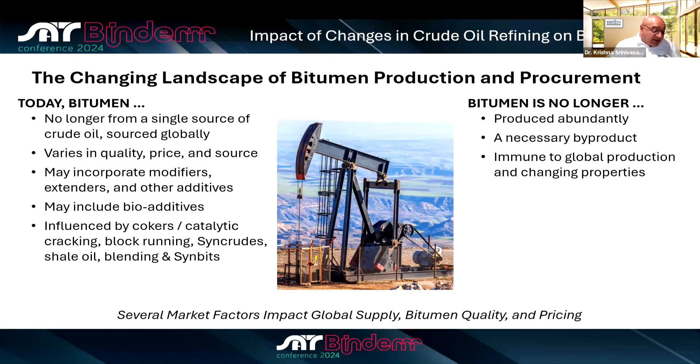The quality of bitumen today may also be influenced by a host of different technologies that didn't quite exist in the last century. Things like cat cracking, syncrudes, even synbit, block running, and a few other things. So bitumen today is not produced abundantly, is not a necessary byproduct, and is increasingly being defined by economics outside our control.

So, what is this new world that we find ourselves in? Many of these elements are familiar to you, so I'll go over a couple of them. But basically, if you give a supplier a spec, he will meet it. That may or may not be what you want. So it is incumbent upon each one of us to define what performance means to us in terms of conditions of traffic, in terms of climate, in terms of expectations for a lifetime.

You see, the very PG specs that were put together at the turn of the last century, several state departments are modifying them. Now you have PG plus with MSCR. You have PG plus plus with perhaps some mix level testing also thrown in, in terms of fracture toughness, in terms of moisture resistance. Your grandfather probably defined a pen softening point spec, and that served him well. It even served his son well, perhaps. But that kind of permanence is now disappearing, and there's an ongoing search to define better. And newer analytical techniques have also helped define what is needed for performance.

Another point that needs to be mentioned is several regions, several countries have become completely or partially dependent on imported bitumen. Several facilities have closed. Certainly, new ones have come up, but many have closed. And South Africa is perhaps just one example of this. You will have to learn to live with imported barges every 1, 2, 3, 4 weeks, and some advanced recon may now become a key tool in your toolbox. High RAP mixes are also becoming more widespread around the world. This has an impact on demand, and that has an effect on reliability of supply and perhaps even quality.

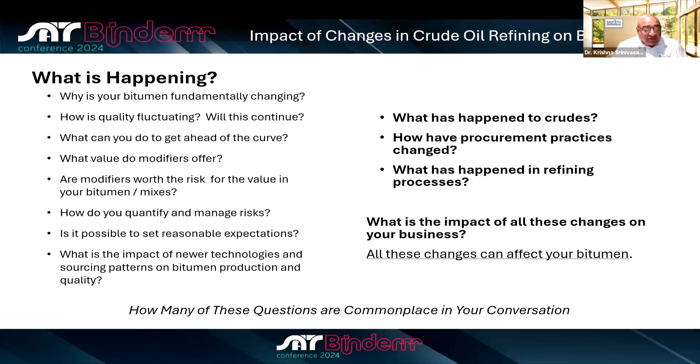How did we get here? This is part two. This is a crude depiction of some of the changes in the crude oil process. Pardon the pun. I'll provide some of the backdrop and highlight some of these. In the 80s, it was quite common for refineries to either operate on heavy crudes or light crudes. Heavy crudes, heavy in bitumen content, heavy in solids content, and light crudes exactly the opposite. The appearance of crack spreads used to cause great dislocations and perhaps jeopardize the economic viabilities of several companies. So today, refiners can operate with either just by the flip of a switch. In fact, they operate with multiple input crudes, called a slate of crudes, that consists of elements from both or either.

Cokers, predominantly introduced maybe late 90s, have now come to, and light end harvesting. This is simply the practice of getting more and more light ends from that barrel of crude, and therefore that has changed what's left behind in the bitumen and impacted the bitumen characteristics. As has the practice of using synthetic crudes, shale oil crudes. Really they've been created to run very efficiently in refining operations, but some of them do produce poor quality, documentedly produce poor quality bitumens.

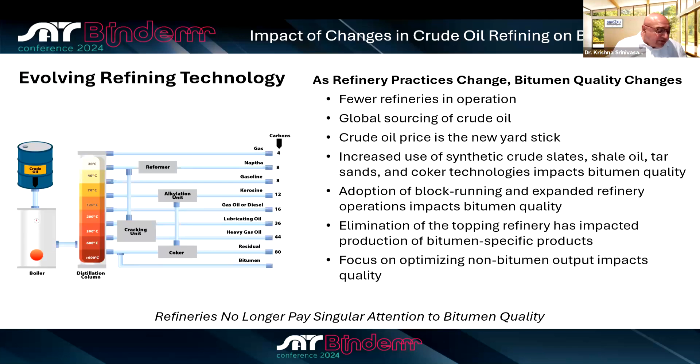Why is all of this important? Ladies and gentlemen, I'm going to lay out some corollaries for you. And I'd like each one of you to say to yourself at the end of my sentence, while still meeting functional specifications. So let's play this game. Different crude oils, and different speakers today have alluded to this, different crude oils yield different grades of bitumen, while still meeting functional specifications. Blending of different crude oils or blending of different bitumens creates different functional characteristics while still meeting specifications.

So you see, there are a number of factors that can be changed at your bitumen level while still meeting what it is that you have nominally defined as a spec. And this is what people are discovering. Something may meet spec for softening point or PG grade, but may not be suitable for PMB, polymer modifieds, in terms of stability, in terms of compatibility with bitumen. It may not meet emulsion producers' requirements. So there is that element that has to be considered today.

The other thing that I do want to touch upon briefly is there is a large number of new players. There always has been a large number of new players entering this business. What is new here today is the rise of integrated traders. These are people who initially started off as price speculators, either in crude or in bitumen.

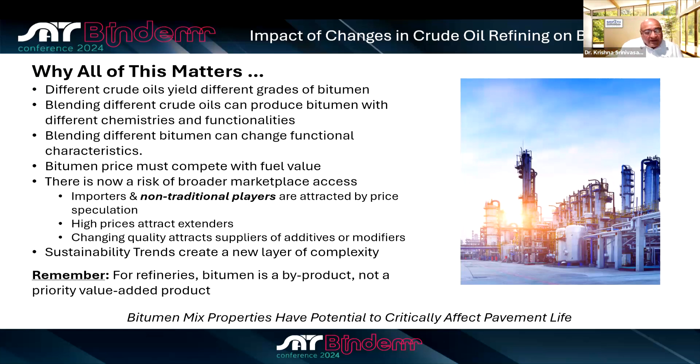2-minute warning, sir. Yes. Can you hear me? 2 minutes.

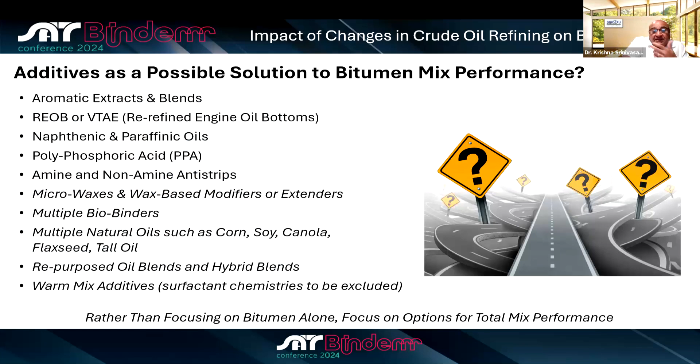So there have been quite a few impacts of these changes. I'll highlight a few of them very briefly. There has been an astonishing rise in the number and scope of modifiers now used in this industry. I'll just point out some of these. Most of you are familiar with them. The ones in italics are the ones that are perhaps more recent.

Another consequence is the rise of PMBs, perhaps even in overspecifications. They have a history of documented performance, and so there's perhaps an increase, and some of this may have been driven by traffic conditions, by climatic conditions, etc.

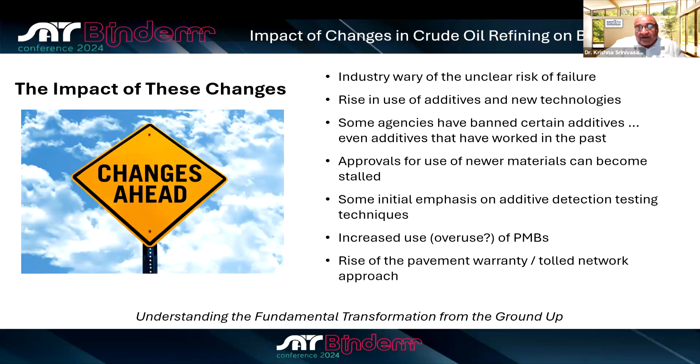Another impact has been the rise of what's known as a managed network. And in these, you have people in many countries who build, operate, own, and toll, and they have very specific maintenance specifications in terms of duration in which the pavement needs to be reworked. They perhaps are not as sensitive to the needs of quality that some of the longer term pavement durability people need in terms of 5 years, 10 years, 15 years, and so on.

So I've outlined quite a few changes and quite a few upsets. So the question is, is the situation hopeless? Not quite so. Quite a few steps are being taken. Let me start with the notion that it is possible to take a substandard bitumen and still create a quality mix. And this has been largely the purview of additives and modifiers and extenders.

With the usual caveats, they don't always work. They don't always work across different bitumens. They're not consistent. And dosing, the level of usage of some of these materials, is quite sensitive to various issues such as durability and phase separation, etc.

The thing I want to highlight is perhaps this audience should start considering mix level targeted specifications, not just binder only parameters. This notion that binder level properties can consistently predict performance related characteristics may increasingly not be the case.

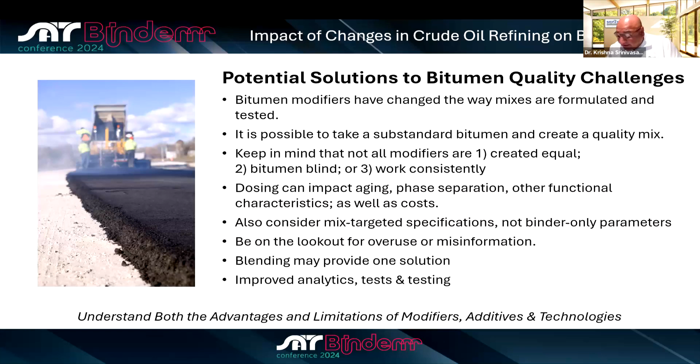Blending, I mentioned blending as a cause of variability. Several industry participants are actually using this, mixing two or more non-standard bitumens to be able to produce an on-target material. The other thing that must change is obviously some of the conversations and the attitudes.

I'll mention one thing here on the slide that I think several speakers have spoken to, and I think the notion that chemistry can be defined, or even that quality can be defined in terms of asphaltenes and maltenes, and perhaps a peak in an FTIR curve, that's probably going to go away in a little bit. And here's the reason why.

It's not that it doesn't have scientific meaning or is germane. It's that your supplier cannot measure it. He cannot modify it. He cannot do anything with it. And he is more reliant on physical property characteristics, rheology characteristics, and so on.

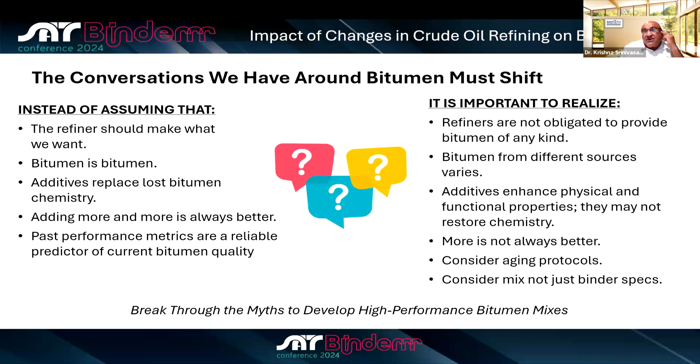I think I've already mentioned this. Adding more is not always better. There is a feeling in this industry, if 5% works, 10% will be fantastic, and 25% will be absolutely fabulous. With some of these new additives, that's not quite the case. And finally, performance metrics need to be considered in terms of incorporating both mix level specifications as well as binder level specifications. I hope I've given you a good insight into some of these changes.

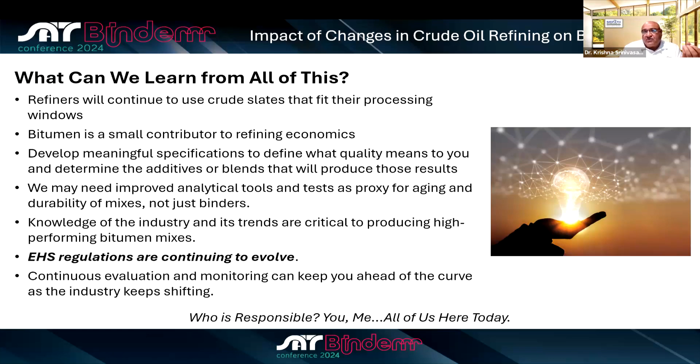The only thing that I'll mention on this slide is environmental health and safety regulations. These are continuing to evolve, particularly environmental issues. The drive towards net zero is now beginning to spur the use of bio-based binders, not just 2, 3, 4% biomaterials in your binder, but 10, 20%. And the long-term implications of this are largely unknown.